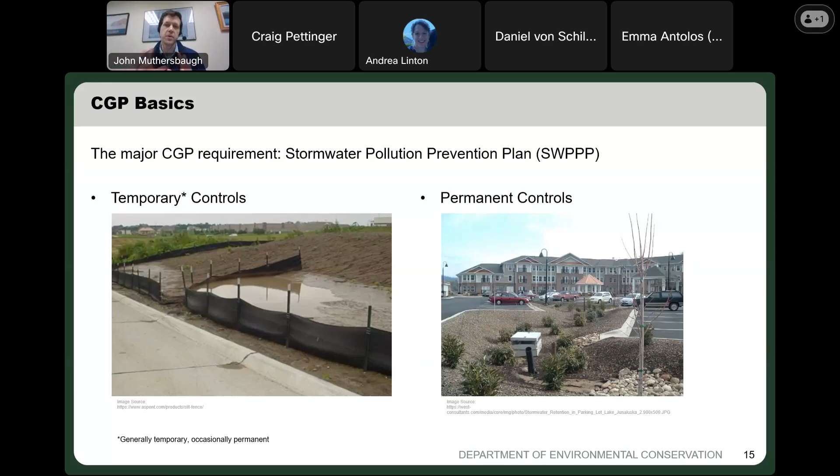But the major requirement of the CGP is the SWPPP, and this is kind of at the heart of the program. And so there's the SWPPP itself, the plan, and then implementing it during construction, and then inspections and so on. But there are many more requirements with the program; this is kind of big picture what it's all about.

That's the basics. So it's a very brief section, the first section of this presentation, but just to summarize, we've covered what the CGP stands for: it's the Construction General Permit within the DEC SPDES program, and it's applicable to soil disturbing activity. That's when it comes into play, and it's protecting water quality for surface water. And it does that by requiring these pollution prevention planning and control measures. That's a quick summary of the first section.

And now we'll jump into the second section, which is the CGP web pages for the program. So the CGP program, we have two separate web pages. The first one being the Stormwater Permit for Construction Activity web page, and then also the Construction Stormwater Toolbox web page. And we'll walk through the two web pages and highlight some key information accessible on each. So the first one, we can just refer to it simply as the CGP webpage, the Stormwater Permit for Construction Activity.

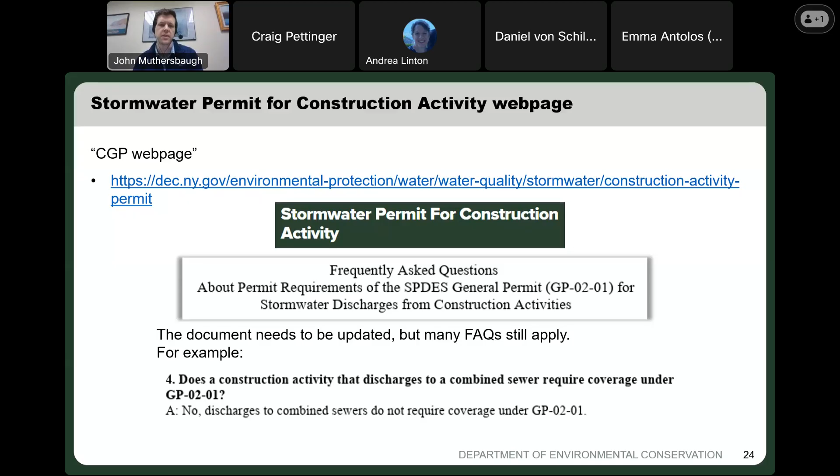So for example, on the screen, you can see FAQ number 4. Does a construction activity that discharges to a combined sewer require coverage under GP-02-01? And the answer is no. Discharges to combined sewers do not require coverage under GP-02-01. And that's the same for GP-0-25-001. Discharges to combined sewers do not require coverage under GP-0-25-001. That's one example of supplemental documents.

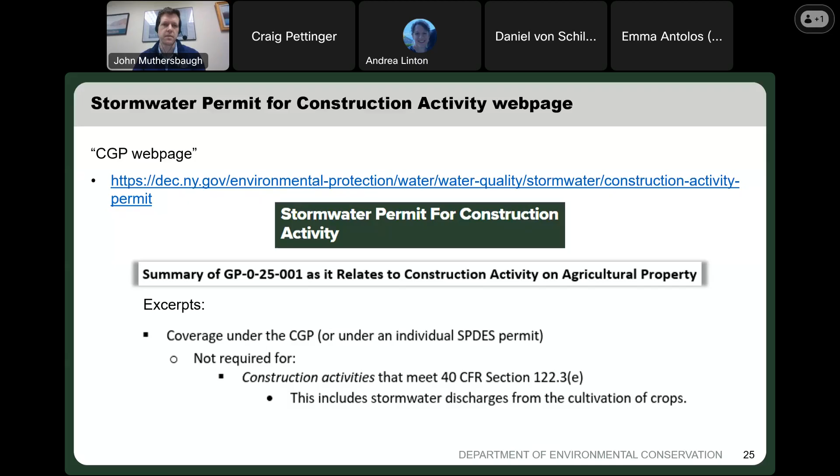So after that section, back on the webpage, the next section is called the process of gaining and terminating permit coverage, which kind of gives a broad outline of how to do just that. And it has information about the application to obtain coverage, which we call the electronic notice of intent, or eNOI. And then when the project is done, how to terminate coverage using an eNOT, or electronic notice of termination. And there are different certification forms, signature forms with those.

Those are all there. And those are submitted through DEC's online nForm portal. And we have a link to that there. And there's information about how to access that and sign up for that. That's all in that section of the CGP webpage.

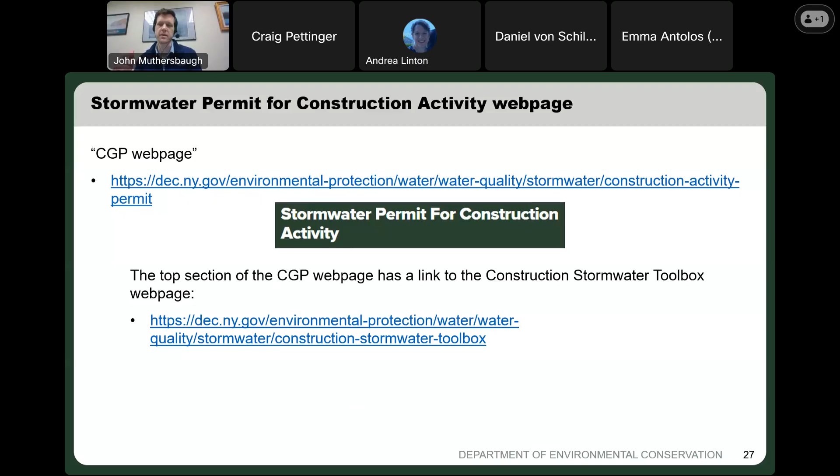So still on the CGP webpage, if you jump to the top, again, I said it earlier, but there's a link to the toolbox webpage, and we'll go to that one now. Similarly, there's a list on this webpage of what's on the page. You can click down, jump down to a specific section.

We'll walk through these, but before I do, just a quick tip that this webpage is really geared towards SWPPP designers or construction site inspectors or MS4 operators who are doing construction site inspections or reviewing SWPPPs. So professional engineers, registered landscape architects, CPESCs, which are certified professionals in erosion and sediment control. This is really more technical information geared towards that community. I think many of the attendees today are that audience, the key audience.

So on this toolbox webpage, at the top, we have our two technical standards, technical documents, the Blue Book, which is the standards and specifications for erosion and sediment control. Back on that kind of CGP 101 basics page, we had the two images. The silt fence on the left side was a temporary control. That would be from the Blue Book for the erosion and sediment controls.

And then on the right-hand side of that slide, we had the image of a permanent control, and that would be from the design manual, the stormwater management design manual. So those are the two technical requirements that the permit refers to, and they have supplemental documents, just like the permit does on the other webpage.

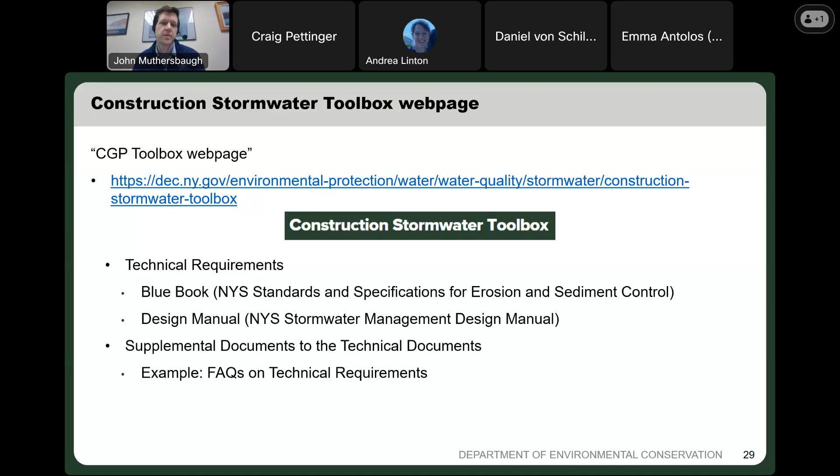And then there are also technical tools on this webpage. There are several, but I especially wanted to point out that there's a stormwater interactive map, and then runoff reduction worksheets for use with the design manual. There are more tools than just that, but I wanted to point those out in particular. And we'll look at the stormwater interactive map right now. We'll jump to that one.

So if you go to this website, this stormwater interactive map, you can zoom in. It's interactive, like its name says. For example, Syracuse in the middle of the image there, you could zoom in on Syracuse, and if you have a site in Syracuse, you can look at the site and then click on different GIS layers that are pertinent for the program.

So these here that I've highlighted on screen, these are CGP specific GIS layers. Other layers on this map are for the other DEC SPDES general permits, the MSGP and the MS4. So this is good for the whole SPDES stormwater program. But if you zoom in, you can use these layers to see site-specific CGP information.

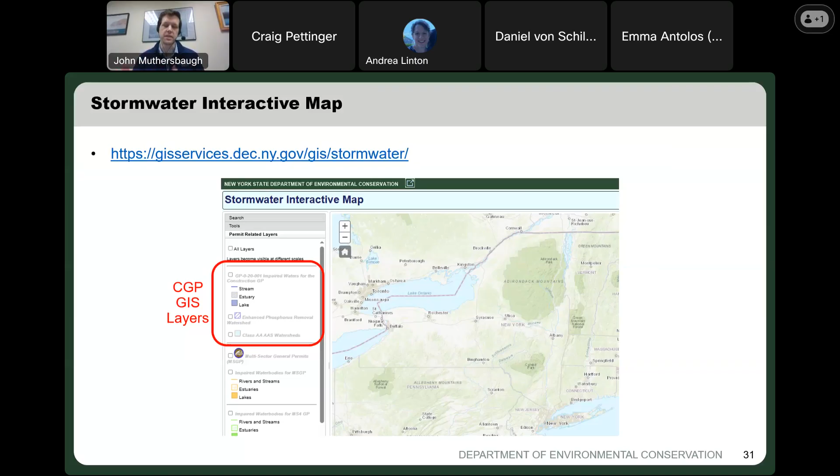And I will point out that right now the CGP layer for impaired waters is still the GP-0-20-001 layer, so that needs to be updated, which leads me to say that this is a useful tool. It's a helpful starting point, but the permit document actually controls. So that layer, the impaired waters, ultimately has to be in the permit document. This is a great resource though, as a starting point to see what's on the map and how it relates to your site.

Okay, back to the toolbox webpage. After the tools section, there's engineering schematics for both the Blue Book and the design manual. We have CAD files, DWG files, and some PDF files as well. And we have a section on proprietary practices, including some that have been verified for use for new development. There's a whole section on those.

And we have a good deal of information about training and certification, including our 4-hour erosion and sediment controls training. Won't spend too much time on this. It's all on the webpage. You can look at it at another time. But also training and conferences, like different cooperative extensions and other learning activities. So there's a great wealth of information on the toolbox and the other webpage.

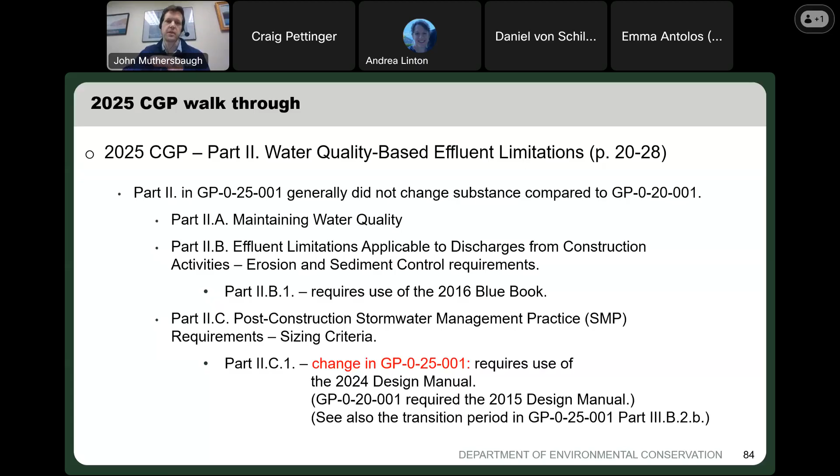So again, going back to the CGP 101 basics, there was that silt fence example of a temporary control, which would be from the Blue Book or the erosion and sediment control standards and specifications, and then any kind of permanent post-construction stormwater management practice or SMP that would come from the design manual. So from these 2 technical documents accessible on our toolbox webpage.

Part 3, moving on, is the SWPPP, the Stormwater Pollution Prevention Plan section. Similar to Part 2, a lot of it's very much the same as it was in the previous version of the permit. But there are several changes, and I'll call out some key ones. The first one is Part 3A2. This one is new, and it's related to climate change. So any project that needs coverage under the permit needs to have a SWPPP, and every SWPPP will need this in it now under GP25.

You need a consideration in narrative format of future physical risks due to climate change, and those risks are listed out in this section. The fact sheet and the response to comments have a lot more on this, but just want to point out a couple quick things. In the screenshot from Part 3A2, you can see the Community Risk and Resiliency Act, or CRRA, referenced. So this had to be put into the CGP based on CRRA. We had to have a consideration of climate change. And this is consistent with what we have in our other general permits under the SPDES program.

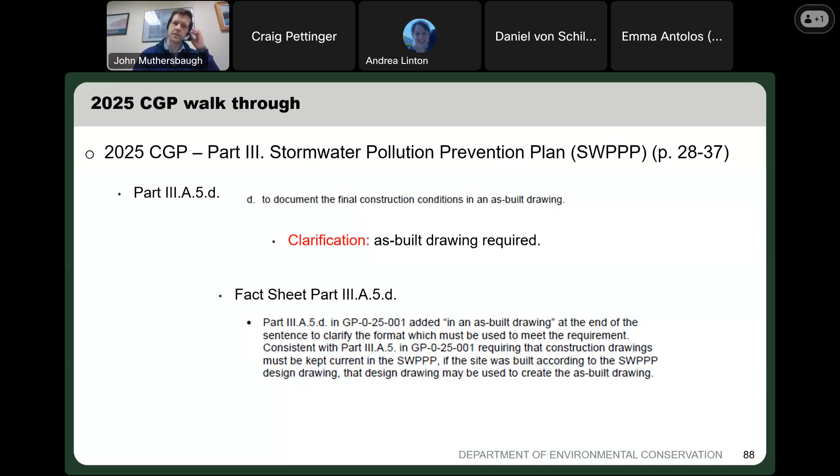All right, Part 3B1C2. Just FYI, there's a few items added to the list of what a site map requires, like north arrows and receiving surface waters. And in Part 3B1C4, there's some new information about what's required in the SWPPP. The SWPPP now requires phasing plans and sequencing plans. So phase is now a defined term. It's that footprint area in a common plan. An easy example being a subdivision, it could be one lot or a couple lots at a time before you go on to other lots.

So a phasing plan is like what you have for a common plan, the different phases, how you're going to proceed in different footprints across an entire larger site, larger common plan. But within each phase, there needs to be a sequencing plan.

So a sequencing plan could be, for example, in basic terms, you've put up your erosion sediment controls first, then you're going on to tree clearing and then grading and whatnot, all the way up until final stabilization and things like that. So that's new. You can check out those requirements in Part 3B1C4.

And again, I keep saying it, the fact sheet and the responsiveness summary help flesh all of this out. And for each section, you can refer to those same sections in those documents as well.

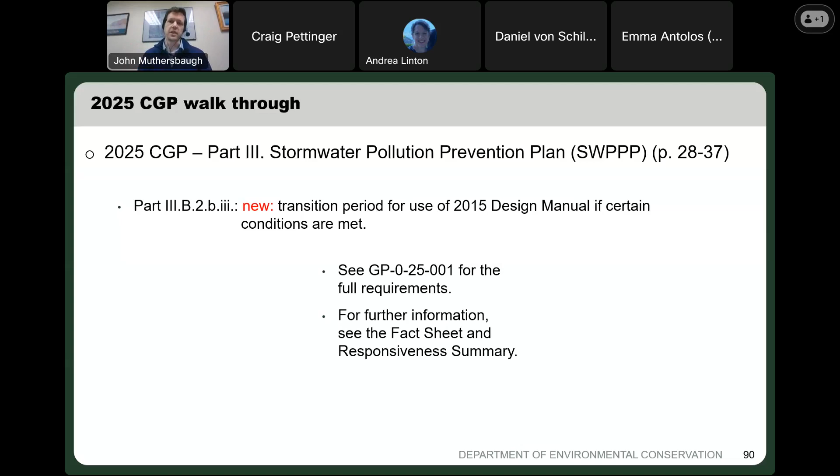So you can see the actual permit requirements, and then the fact sheet and response summary, for example, is about how to make sense of that if that's something you think applies to you. Otherwise, like we said earlier, any new eNOI needs to be designed according to the 2024 design manual if there is that post-construction component required.

Which leads to part 3C, which is required SWPPP components by project type. So back to that CGP 101 basics, there's the temporary controls and the permanent controls. Basically any project that needs CGP coverage needs to have a SWPPP, and all SWPPPs need the temporary controls. But some might also need the permanent controls. So how do you determine what's needed?

And this is a very important new paragraph. This paragraph was added. We noticed, especially in the public comment period, that there is apparently some confusion in the public of how to make sense of the permit and interpret the permit from start to finish, including the Appendix B tables. So this paragraph makes it very clear that

the SWPPP must include the erosion sediment control component. Every SWPPP needs that. But then there's also a potential to require the SMP component, which is the permanent control component, those post-construction stormwater management practices, or SMPs. The fact sheet and the responsiveness summary give more, but basically you look at Appendix B, tables 1 and 2, which we'll get to.

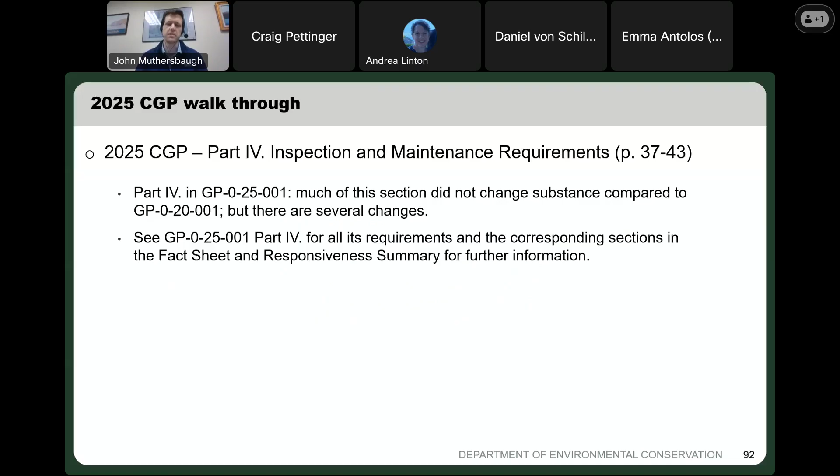All right, moving on to Part 4, inspection and maintenance requirements. Like Part 3 and Part 2, much of this is very similar to the previous version or consistent with it, but there are some changes that we'll point out just like those other ones. Just a few here to highlight, and we'll go to those.

So Part 4.B.1 and 4.C.5 relate to corrective actions by the trained contractor or the qualified inspector. I know the majority of people are familiar with GP-20, so you know what I'm talking about when I say those terms. If you're new to the permit, please read the permit, but it requires that there be a trained contractor and a qualified inspector. And if there are any kind of deficiencies, they need to make corrective actions.

That's not new, but what is new is there are now specified timeframes for when those corrective actions must be completed. And again, the fact sheet and response to comments summary share more about these new requirements. Part 4.C.2.c and d.

Consistent with the previous version, if you're going to have some kind of temporary shutdown, often for like winter shutdown, there was a requirement to notify either the DEC or the MS4 operator of the shutdown. That's not new, but what is new is now there's also a requirement to notify again before recommencing or resuming, just to keep that communication channel open. So just a minor change there. Again, the fact sheet and the response summary have more about that.

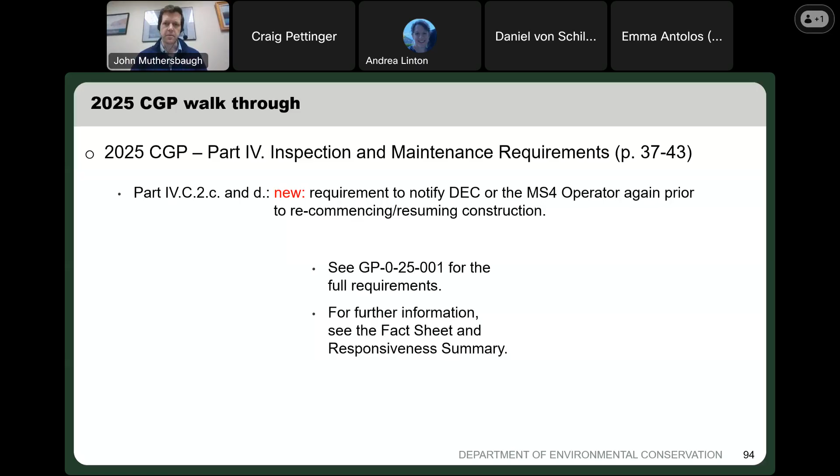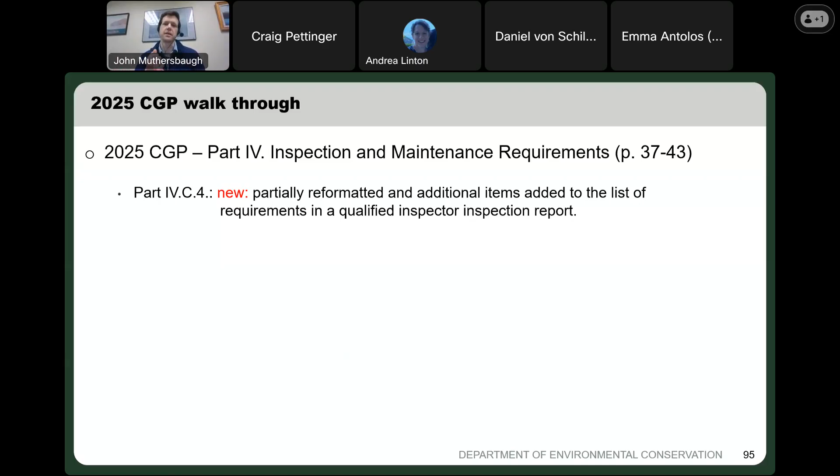Part 4.C.4 is just reformatted like other places in the permit, but also some additional items have been added to what is required in a qualified inspector inspection report, if that is required. If you need a qualified inspector, you need to have these requirements met for what goes into their inspection reports, and there are some new items in that list. I won't go into details, but the permit itself can be looked at, along with the fact sheet and response summary. Just wanted to point those out.

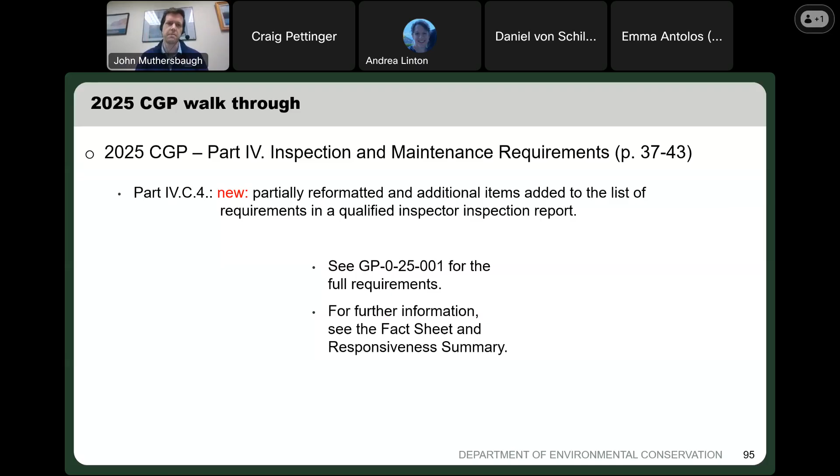Part 5 is how to terminate CGP coverage. Like the previous sections, it's very similar, but the big change here is new. The previous version of the permit did not have an nForm NOT, it just had a paper copy. So new with this GP-25, there's an electronic notice of termination, eNOT, and it's also an nForm just like the eNOI. Here's the link for it. It's already been in use, and it's a lot more efficient. It's very similar to the NOI.

You get into nForms, and the descriptive name is CGP eNOT for GP-0-25. Click on begin form. Similar to the eNOI, there are different sections, and in each section there are required fields. Again, it's also based on self-certification. Once all the required fields are entered, you can submit it. If you don't provide the required information, it won't come through and won't be complete. But once you fill it out and submit it to us,

according to Part 5.A, the owner-operator's coverage is terminated as of the termination date in the LOT, a letter of termination that will be sent by DEC once you submit the eNOT. Just like you submit the eNOI and get an LOA, a letter of authorization, you submit an eNOT and you get an LOT, a letter of termination. Just like the LOA, it is automated. It gives you an immediate confirmation that we received your eNOT, and you have confirmation in hand that coverage has been terminated.

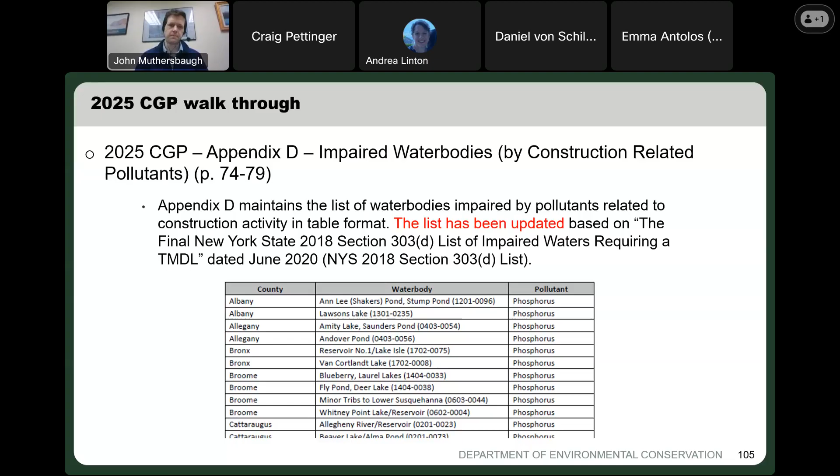And before wrapping up this section, I wanted to point out we've received a few frequently asked questions about a few specific citations in the permit. We've received several questions on these, so we want to share the information broadly. So the permit, going from GP20 to GP25, the draft was public noticed, and then the new one was finalized and issued, and GP20 is now expired. GP25 is effective.

So it's effective for a 5-year term, but we could modify it sooner, and we might try to do that. I don't know a definitive timeline, but hopefully this year we might modify it to correct a few things or provide clarifications. And I'll just point out a few specific things like that. For it to be modified, it would have to go to public notice, just like previously, and go through that process. But we'll just look at each of these.

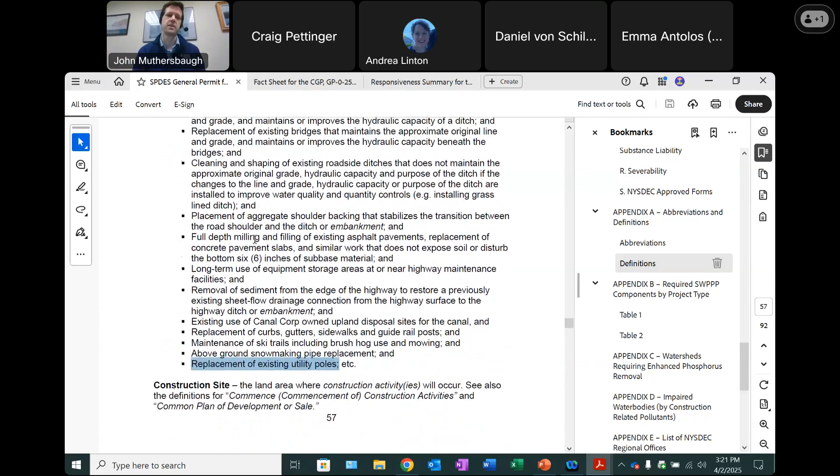And in that process, we probably just missed that there was that confusing bullet kind of conflicting with it in Table 1. But since it's listed here under the example of routine maintenance, it is routine maintenance. I'll make note that that's something else we could clarify. And conceptually, if you see anything like that, feel free to reach out and we'll help clarify how to move forward with any scenarios like that. So thank you for raising that to us.

For developing solar farms that meet the requirements for only erosion and sediment controls, can the contractor stabilize the site in phases of less than 5 acres and then come in and install the posts and panels all at once after the site stabilization has grown?

Sorry, I was making a note. So they are disturbing more than 5 acres or less than 5 acres? They're assuming they're disturbing less than 5 acres because they're stabilizing in phases of less than 5 acres, then coming in after everything is stabilized to put in posts and panels. Is that allowable, I guess, is the question.

I guess maybe we would need a follow-up question just to kind of nuance the question. But I think one of the aspects of the question is, can you disturb a certain amount, stabilize, move on? And the answer is yes. So as long as you're staying on that issue of greater than 5 acres, you can disturb less than 5 acres, stabilize it. Once it's stabilized, then you can move on and do further disturbances. And you're good without having to do a request to disturb greater than 5 acres.